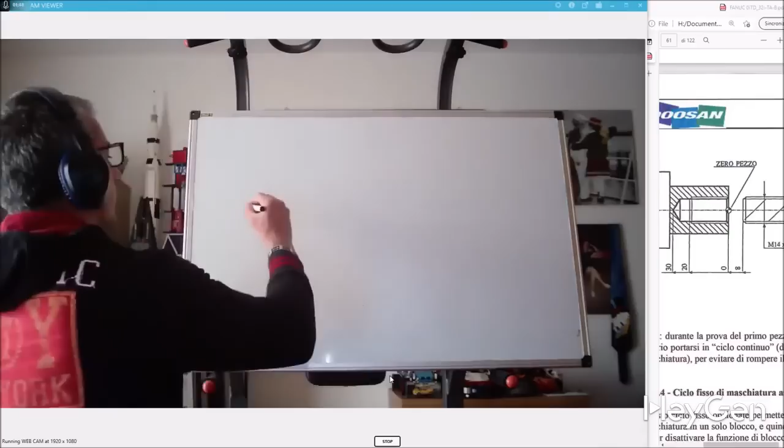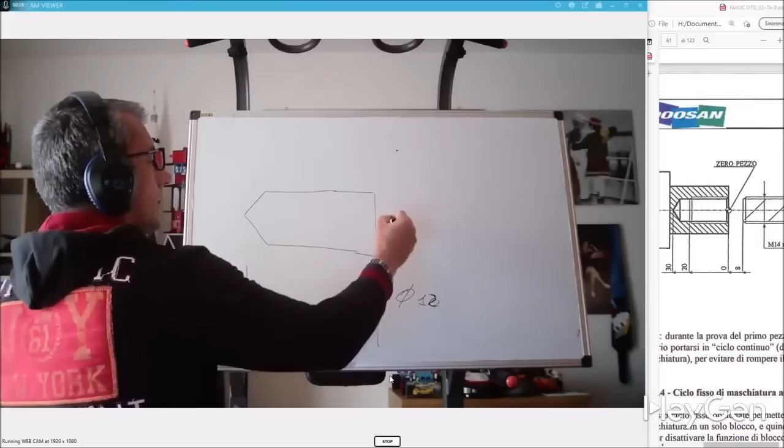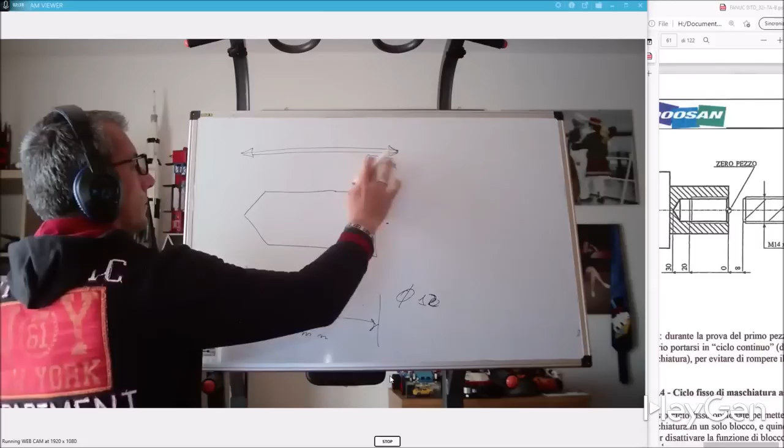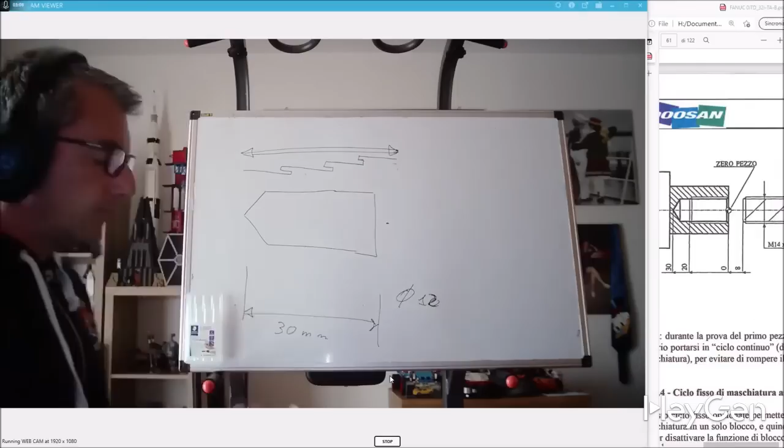Drill bit. There are two options. Either position yourself in front of the piece, move here, do it in one go and then pull back, or do it in steps, retract by a millimeter, do it again, retract by another millimeter. Obviously, this is to help you understand; the tip won't be stepped, it will move in one direction back and forth. This is important for chip breaking, especially with very pasty metals where the chip doesn't break and risks getting tangled around the tip or creating volume in the tip's helix and breaking it.

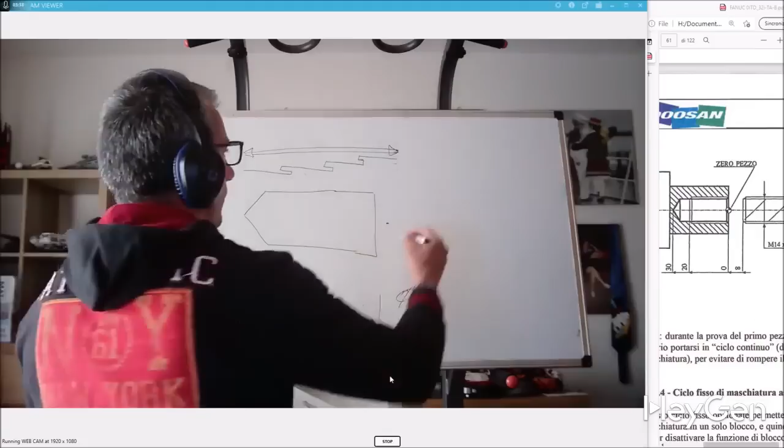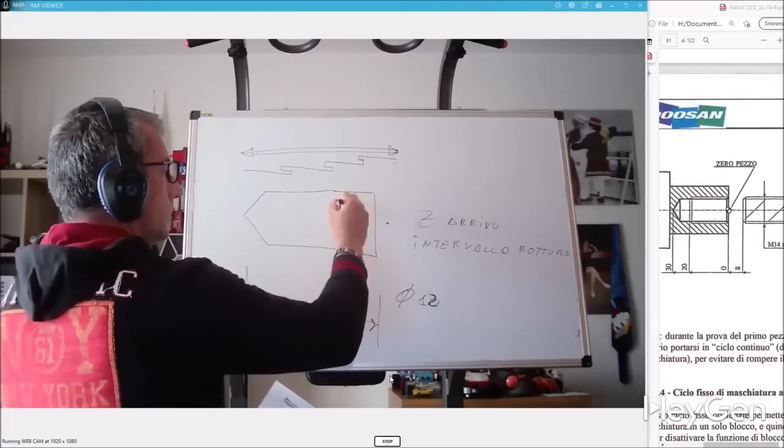Let's say, for example, we have a hole that's approximately 30 long and 12 in diameter. Nowadays those sharp coated tools don't cause problems, but we learn to manage them in this way. We have a flat tip and a low alloy material, so to drill a hole like this, we basically need to give it three parameters. A target Z, a break interval, meaning how often my tip goes in, stops, pulls back a bit, and then re-engages, and retraction, which is how much I want to pull back.

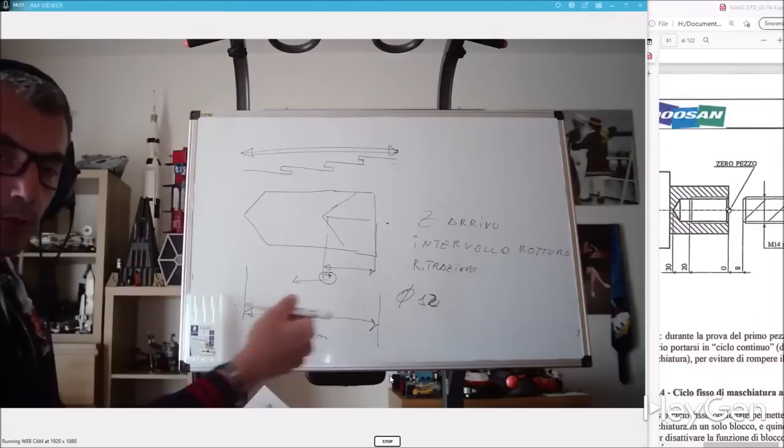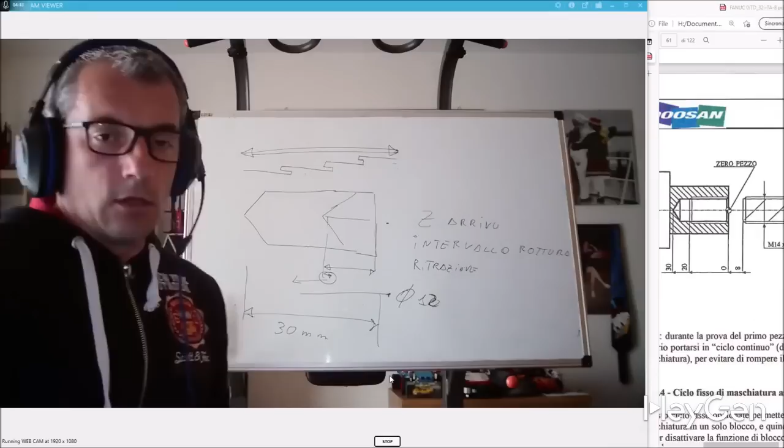Yes, because for some materials, just stopping is enough to break the chip, while for others, it's better to pull back completely. So this is the macro for chip breaking. Some Fanuc machines have this as an option. They even have the ability to completely exit the piece and re-enter. Sometimes it's necessary, sometimes it's not. If the machine doesn't have it, you do it in ISO, make a pre-hole that's half the length, then exit and make the other hole. You also need to use your head a bit. So the three parameters are target Z, break interval, and retraction.

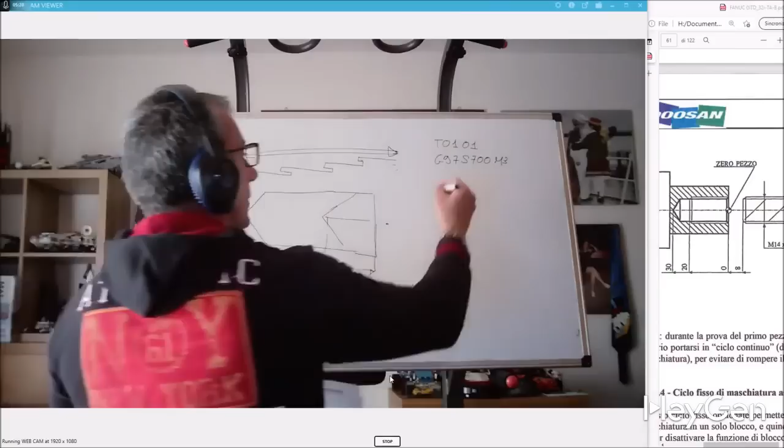Fanuc, how does it give it to you? Let's say we've named our tip T0101 and we're working with a helical tip that is programmed at X0. So what do we do? Let's set a G97, S700, M3. Remember, the drill bits spin in the opposite direction. Then G0, X0, Z4. We position ourselves here, safely.

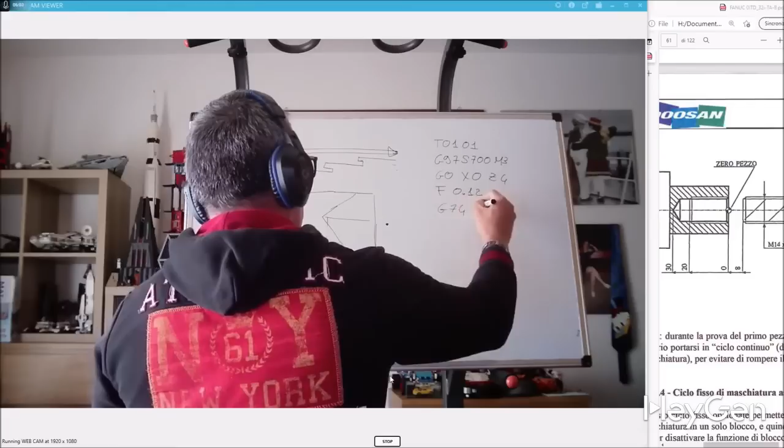In some machines, the F needs to be set first in macros, while others accept it in the macro itself. Just to be safe, we set the feed rate F0.12 before giving the macro. Here comes G74 R1, G74 Z-30 Q5000. What does that mean? R1, G74, Z minus 30, Q. We instruct the machine to peck in 2 blocks.

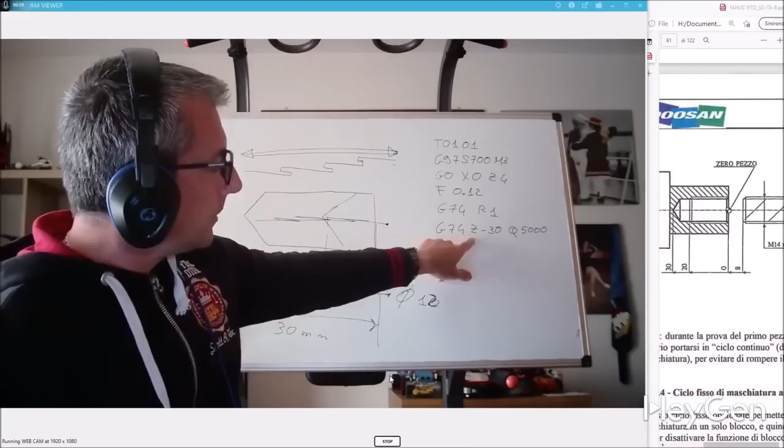Using G74, we execute a deep drilling cycle with a chip breaker. The macro ends at Z-30, moving from Z4 to Z-30 in 5,000 thousandths. Every 5 millimeters, you stop, retract 1 millimeter, and restart. If travel isn't a multiple of 5, the last step can vary. Starting from Z4, steps are Z1, Z6, Z11, Z16, Z21, Z26, Z30.

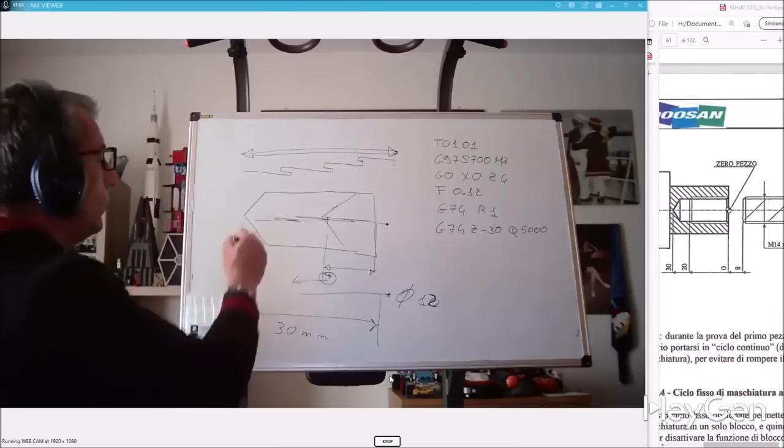Begin with a G1 approach to Z0 before the macro. Once done, the machine returns to G0 X0 Z4. If unsure, repeat G0 X0 to finish drilling. The bit size sets the measurement. If our path is not a multiple of 5, it doesn't matter. The last step will be 2, 3, 4, 2.5 millimeters.

It's not a problem. As you can clearly see and understand, we start from Z4. For the machine, the zero is at Z4, so it will indeed take a first step to Z1, Z6, Z11, Z16, Z21, Z26, Z30.

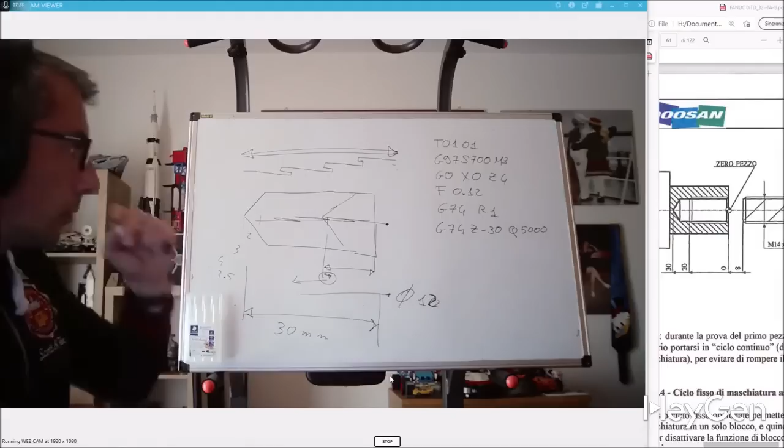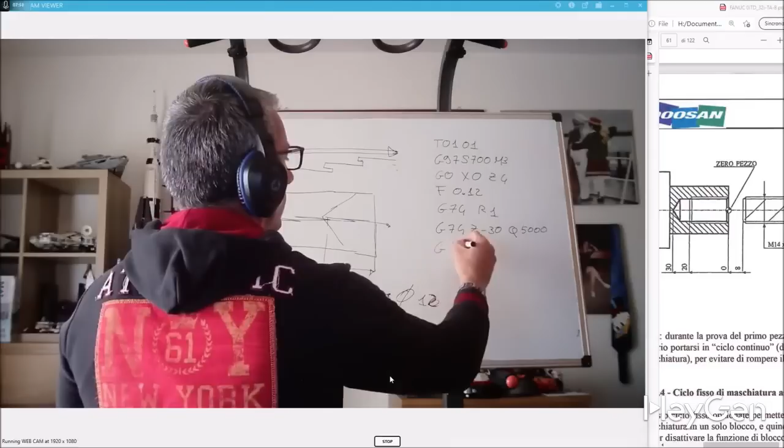So the last step goes from 4 millimeters. Obviously I didn't optimize this. For example, you could have first set a simple G1 approach to Z0 and then started the macro. That said, once the macro is finished, the machine automatically returns to G0 X0 Z4. If you're in doubt or have any concerns, just repeat G0 X0 and you've drilled your hole, you've done your work.

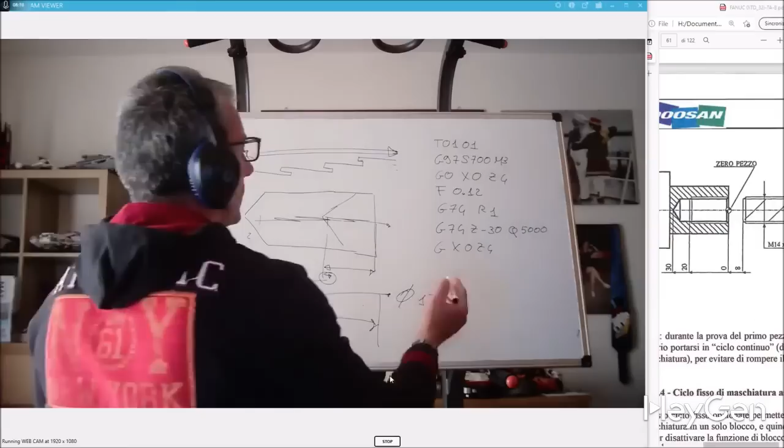You see, in this very specific scenario, the machine doesn't care at all if you have a drill bit that's 1, 2, 10 or 20. It will make its hole, and then the size of the drill bit will determine the measurement. Also, especially in this case, the machine operates efficiently. If you're working with an insert bit for the machine, there's no problem. Insert bits are specifically designed for precision and efficiency, making them ideal for various machining tasks.

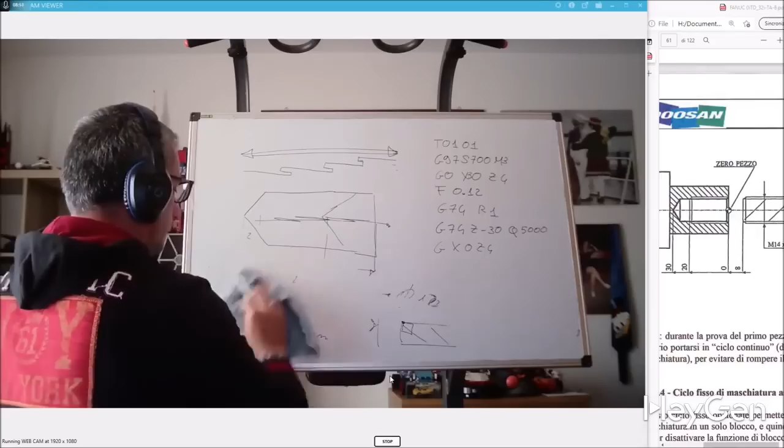If you need to make a 30mm hole, you have a 30mm bit for the machine, so working at 30mm is fine. This ensures that the hole is accurate and meets the required specifications. So if you have a zeroed insert bit, at this point, it can be used like a drill. This means that the bit is perfectly aligned and ready to perform the task without any adjustments. That said, with insert bits, it's not common to break the chip unless in extremely particular conditions. These conditions might include excessive force or incorrect usage, which are rare when proper procedures are followed.

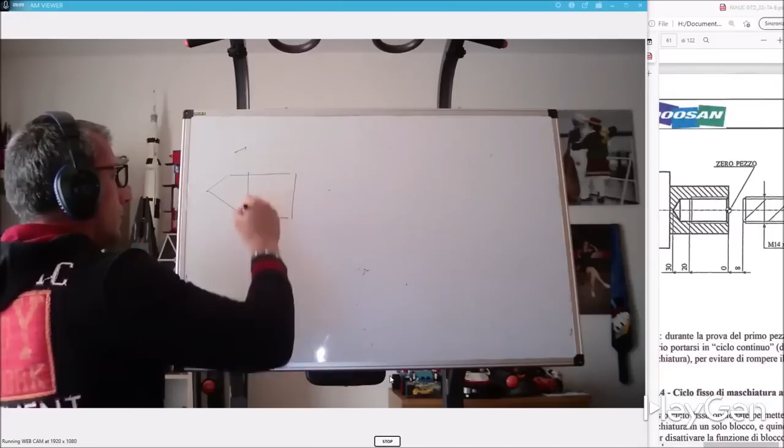Now that we've made our hole, we need to thread it. Threading is an essential process that allows for the insertion of screws or bolts, providing a secure fit. So we have a hole that's 30mm deep, and we need to create a thread that's 20mm long, M14. What do we need to use in this case? We need to use a tap. For those who don't know, a tap, let me prepare a slide for this. Just look up M14 tap online, and you'll understand what it is.

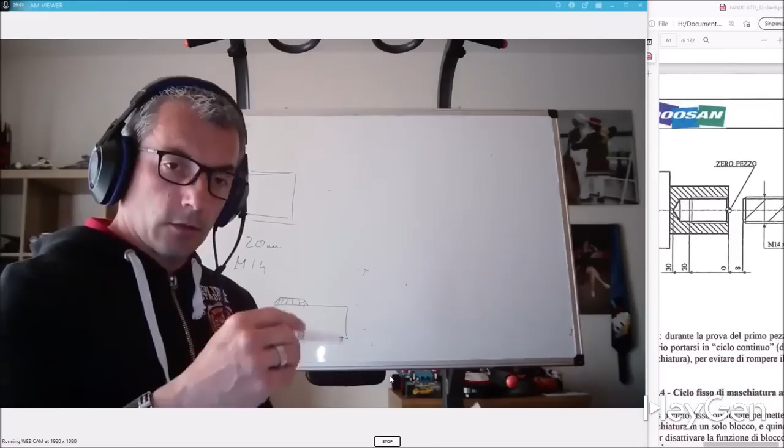It's a cylindrical tool with a series of tapered threads, basically a male thread, which, when it goes in, removes material and creates the threading. This process is crucial for ensuring that the threads are clean and precise, allowing for a strong and reliable connection. It is obvious that when a tap enters, the mandrel must turn in one direction, as if it were being screwed in. When the tap reaches this position, the mandrel must stop and turn backwards to allow the machine to go back without stripping the thread. Here's a little issue that CNC machines have solved for us quite easily.

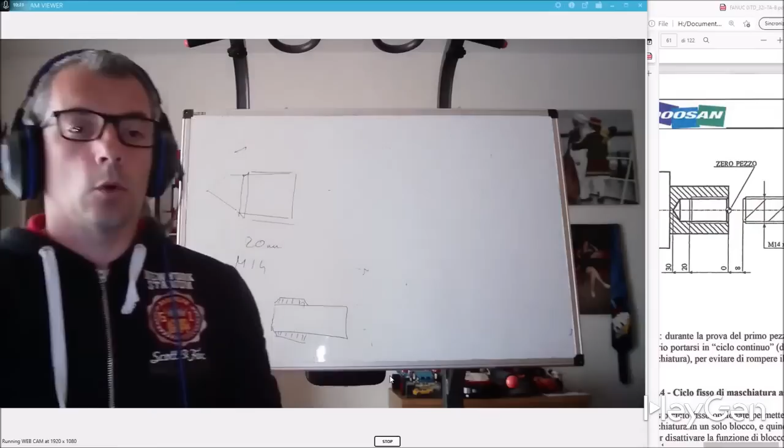There are two methods for threading, with or without a compensator. What is the compensator? The compensator is a gadget that I personally hate. I've probably used it 3 times in my life. Basically, there's a sort of spring here, and when the tap reaches the bottom and the motion reverses, it allows the tap to oscillate in this way so it doesn't break, because during the reverse motion there's a real risk of the tap breaking.

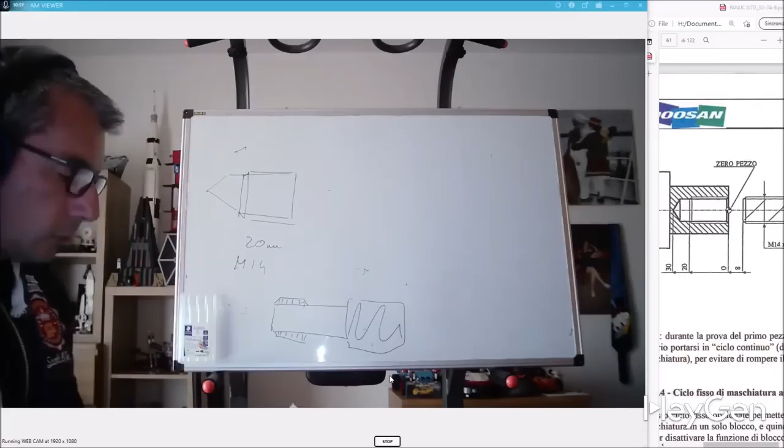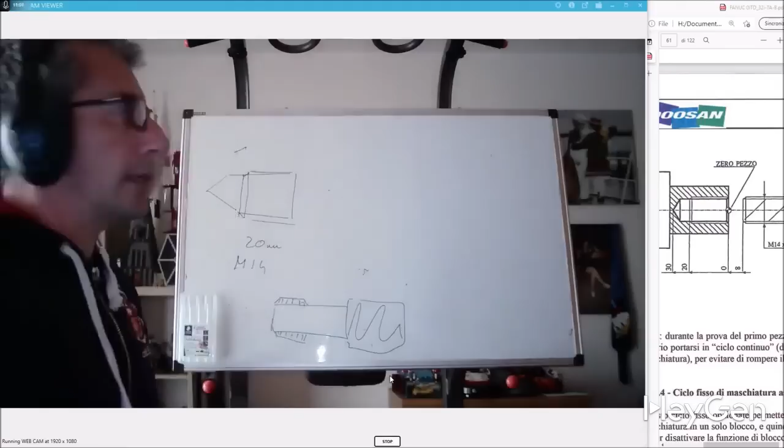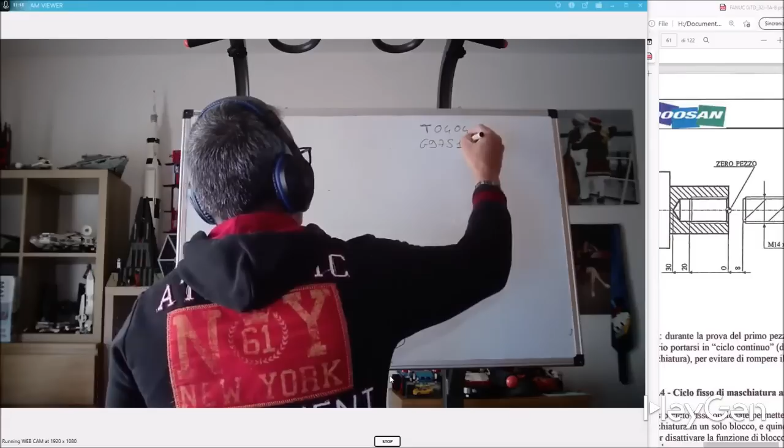If you have the compensator, I don't know if you remember, you thread in G33, which means that threading is always done at fixed speeds, so it's called. The T0404 tool is typically written G97 S100 M3, or M4 if you're tapping right or left. This depends on the type of thread you're making. G0 X0 Z4, G33 Z20 F2, pay attention to M4. So, first, M4 S100 G1 Z4 F2.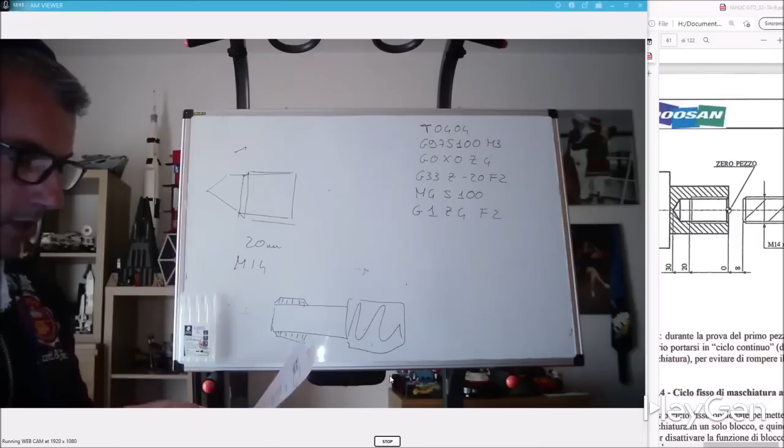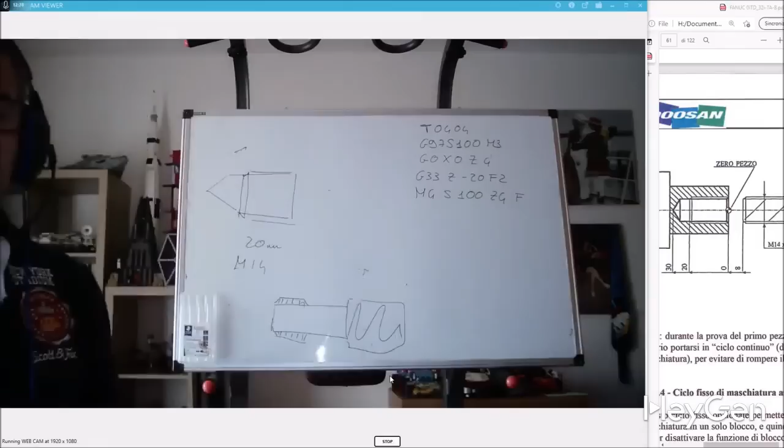I hope I wrote everything correctly because this isn't my usual way of threading, but I did take a couple of notes, so let's see if I got it right. Yes, perfect. These two blocks need to be written exactly together. So Z4 F2. This is the right way to thread with the compensator. I've never seen anyone thread with a compensator in a company, so if there's anyone with different experiences, please write them in the comments because I'd love to hear them. If these compensators exist, there must be some applications or fields that go beyond my experience, and that's totally fine. So this is the method for threading with a compensator.

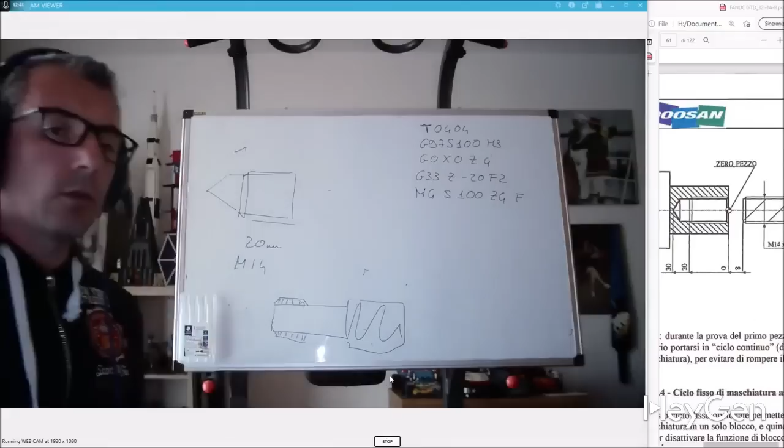I repeat, the compensator allows the tap to thread during the motion reversal, enabling an oscillation of the tap in this sense, so the motion reversal isn't a shock for the tool, and when turning in reverse it comes out like a screw. It was my duty to show you this. Now I'll show you the macro, the fixed cycle for rigid tapping.

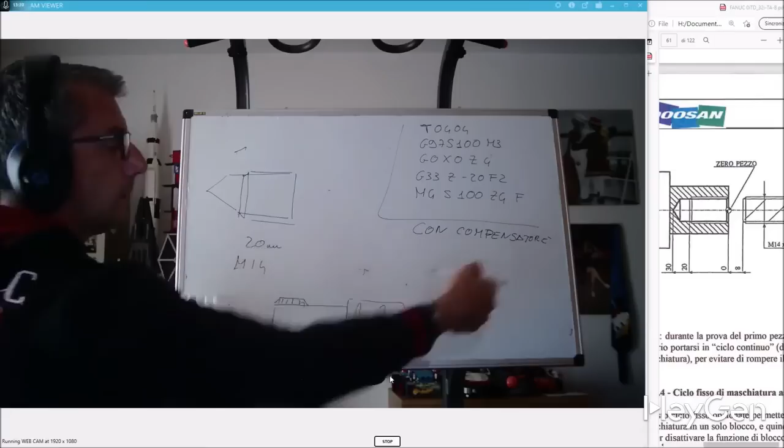So the tap is locked in a chuck, which could be an ER25 or ER32 depending on the machine. This tap is secured in the chuck, and you don't move it in any direction from there. So the only thing you need to be careful about is to make sure that when you're at X0, the tap is perfectly centered with respect to the self-centering chuck. Now I'm going to show you the macro, the fixed cycle for rigid tapping.

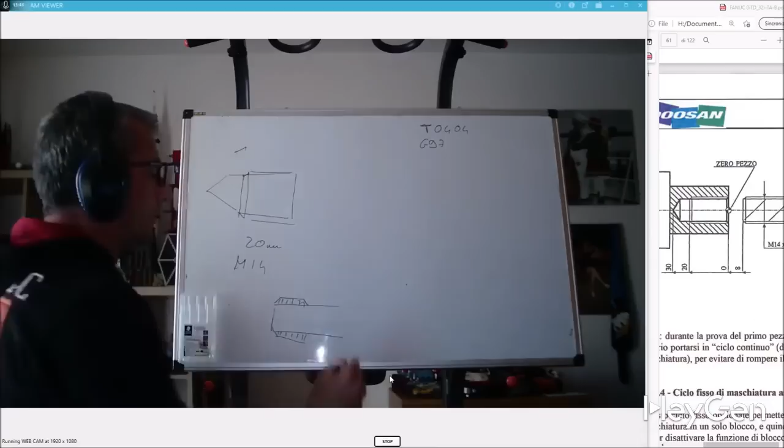So the tap is locked in a chuck, which could be an ER25 or ER32, depending on the machine. This tap is secured in the chuck, and you don't move it in any direction from there. So the only thing you need to be careful about is to make sure that when you're at X0, the tap is perfectly centered with respect to the self-centering chuck.

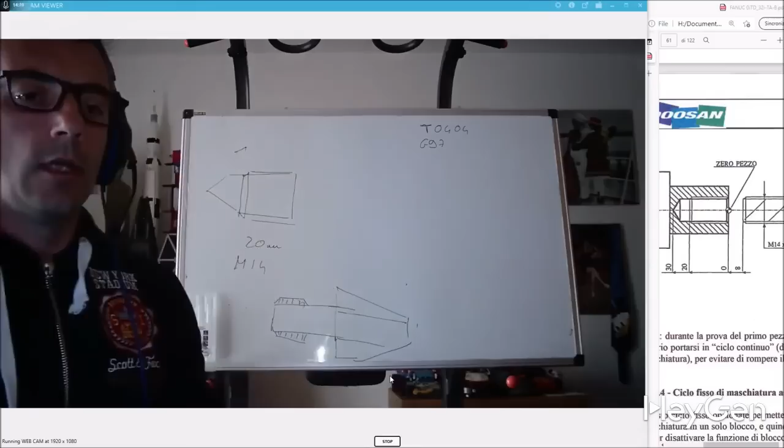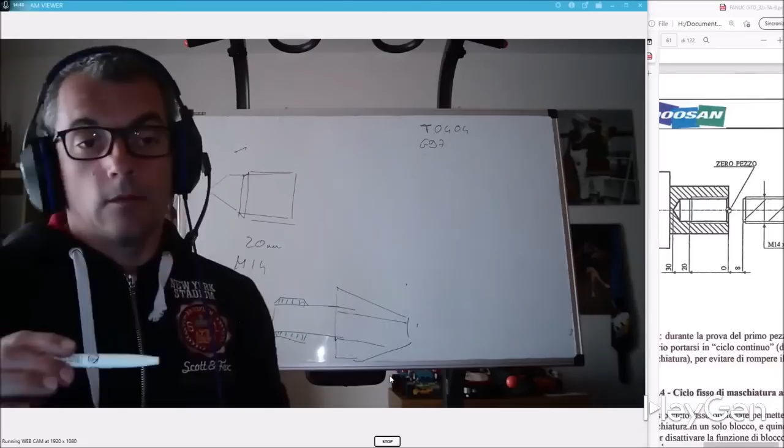To know this, you position the machine with the 0 comparator on the self-centering chuck on the shank of the tap. A 360-degree rotation gives you a range of 5/100ths. Otherwise, the tap is misaligned by a margin that risks breaking it. So, I repeat, when you're tapping, and even more so when you're drilling, check your machine. When you're at X0, the machine's X0 must align perfectly with the workpiece's X0. I warn you that this often does not happen in the company.

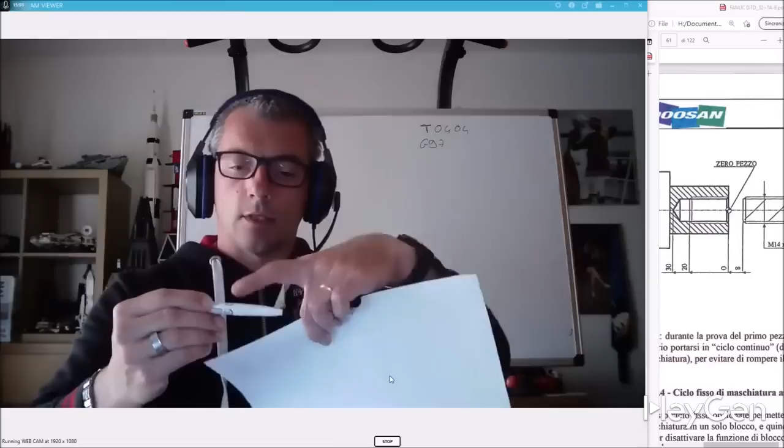Machine issues aren't from age or damage. Adjust X for 0. Shim if Y is off. Check X0 often, especially on older machines. Experienced workers know. So, as long as it's high in X, in X plus or X minus, you just need to move the X a little to make sure the probe's comparator is at 0 above and below, and tell the machine to measure X0, basically zeroing out the tap or the drill bit.

However, when it's high on that hypothetical axis that we don't have, which is Y, you need to intervene mechanically on the tool holder's locking by shimming it. It's not nice to say, but shimming it makes people frown. In companies, we don't always have the latest machines in perfect condition.

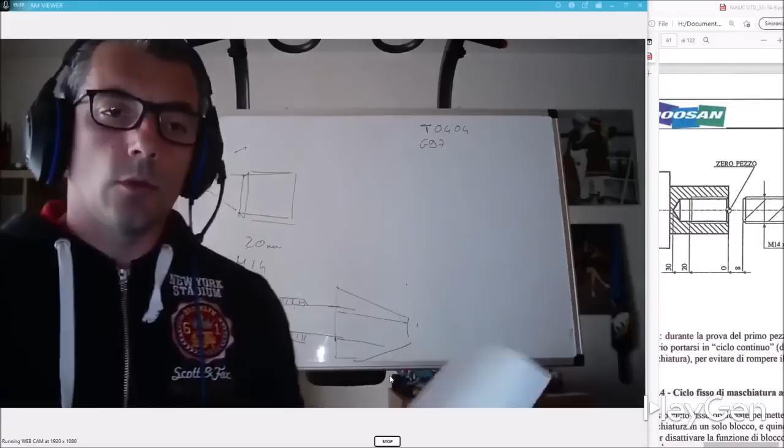This isn't a check you need to do every time you mount the tap, especially if you're always using the same machine. You need to know your machine, so once every 4 to 5 setups, check that X0 corresponds. If it doesn't, make a note of it and write down any adjustments you made to bring it to 0, because this applies to all turret stations.

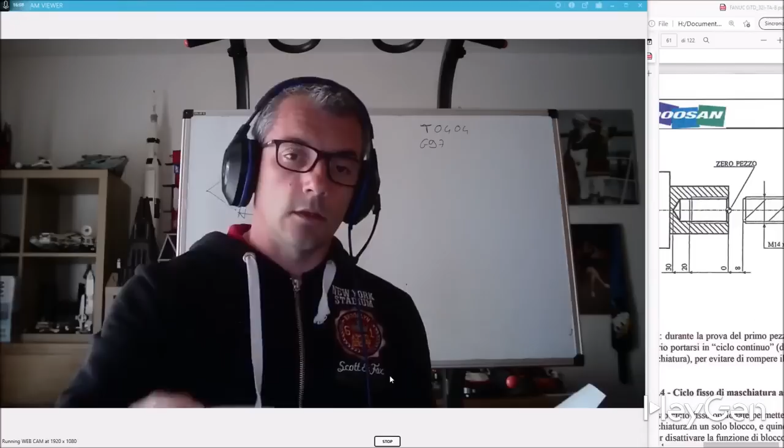Those who have been working in the workshop for a few years will definitely follow me. Those who have never worked in a workshop will remember my words one day and say, oh right, that guy from the course told me that despite everything the manufacturers say, I need to check the taps.

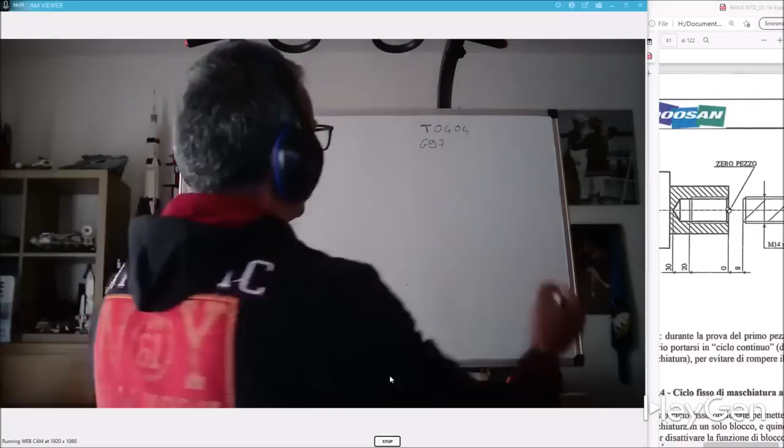Now, back to us. So, rigid tapping with alignment. First of all, we need to force G97, telling it that we're working at fixed speeds, but we won't give it any data because the self-centering chuck shouldn't be rotating right now. I'm positioning myself at G0, X0, Z8.

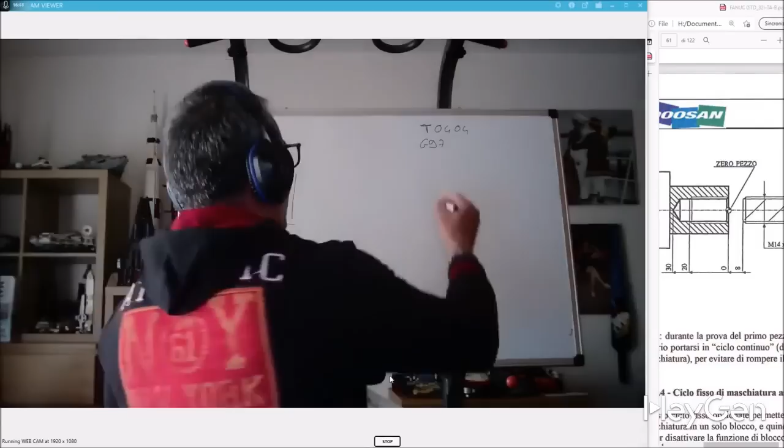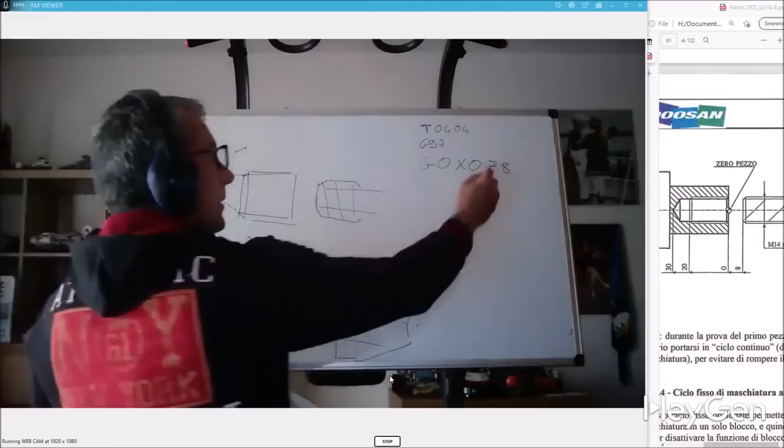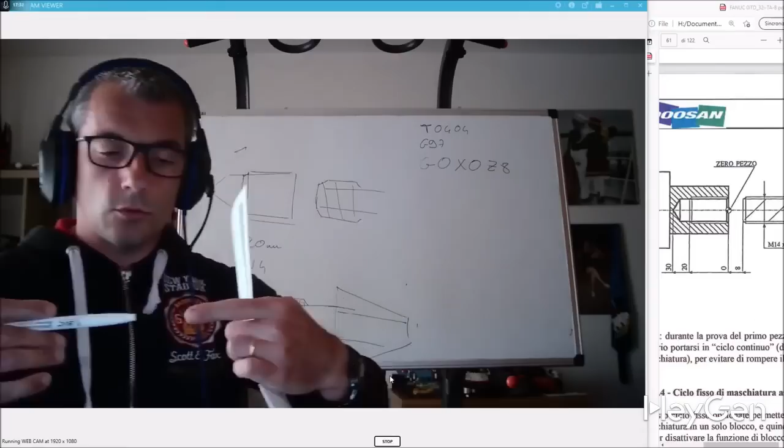So I bring the tap right here. I remind you that the self-centering chuck is currently stopped. Give yourself a good margin in Z because you need to give the self-centering chuck time to start. When the chuck starts to move, so does the Z-axis. It will start moving, but it needs to accelerate. You can't go from 0 to F2 instantly. You need to go from 0 to F2 over a fraction of a second.

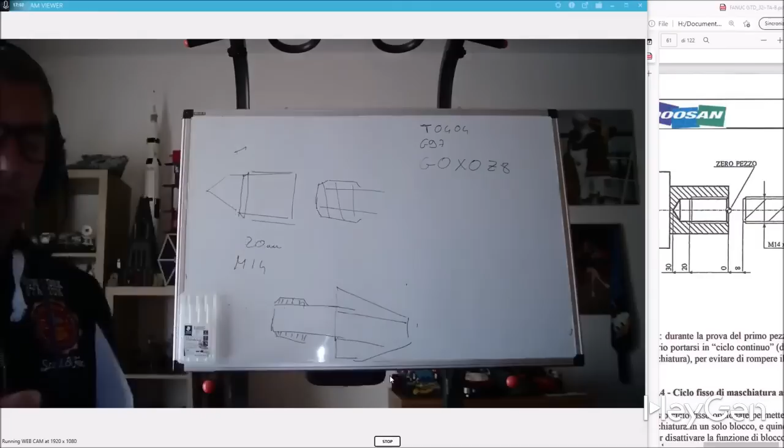If I haven't reached a constant speed by the time I enter the workpiece, I'll strip the thread. So it's better to start tapping well outside the piece, 2, 3, in this case 4 times the thread. It's such a quick operation that time isn't our concern. It's about preserving the tap.

At this point, I can't remember everything by heart. If I could remember everything, I'd be a pro.

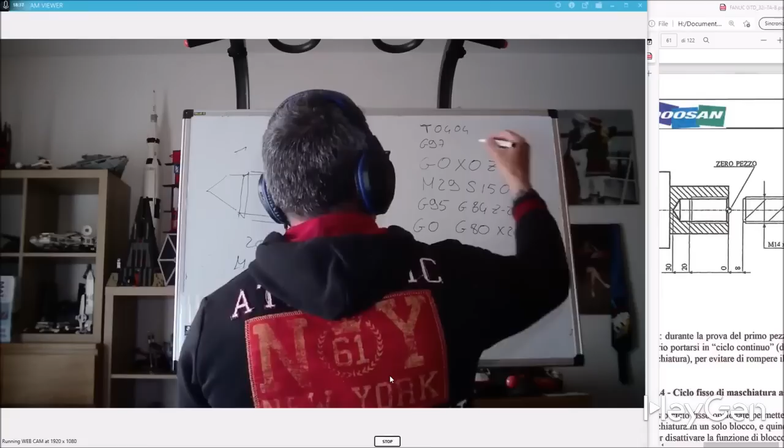M29 S150, then G95, G84, Z-20, F2. Now let's explain. G0, G80, approximately X200, Z200. We can place the M8 wherever we want. Tapping right is rarely done. So, what did we say to it? We are here. We brought ourselves here in front.

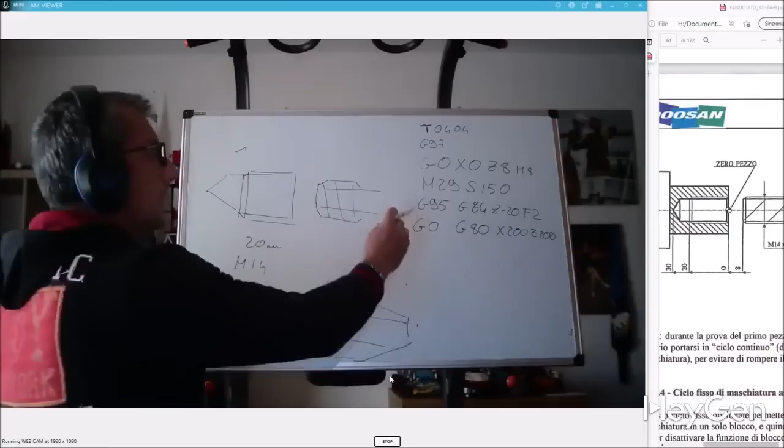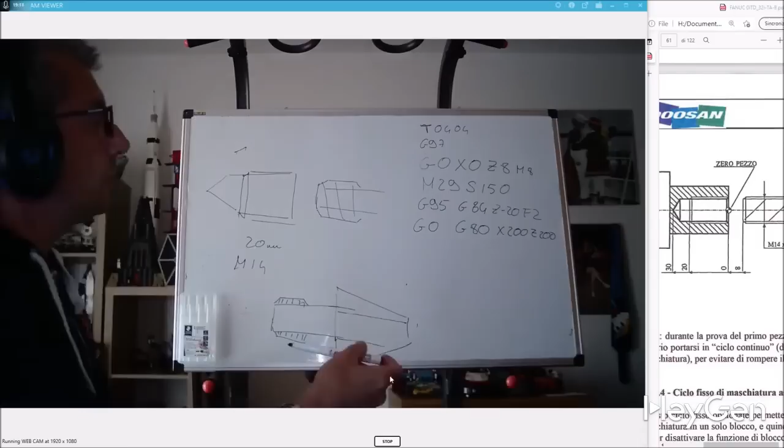M29, S150. We tell the machine, hey, watch out, we're starting a fixed cycle at 150 RPM, a fixed cycle for rigid tapping. Rigid tapping will happen in G95. If we've already set G95 earlier, there's no need to repeat it, but for sure, F is 2 millimeters per revolution. If I want to make a pitch of 2, every turn my tap needs to advance by 2 millimeters of thread down to Z-20, and then I'll come back.

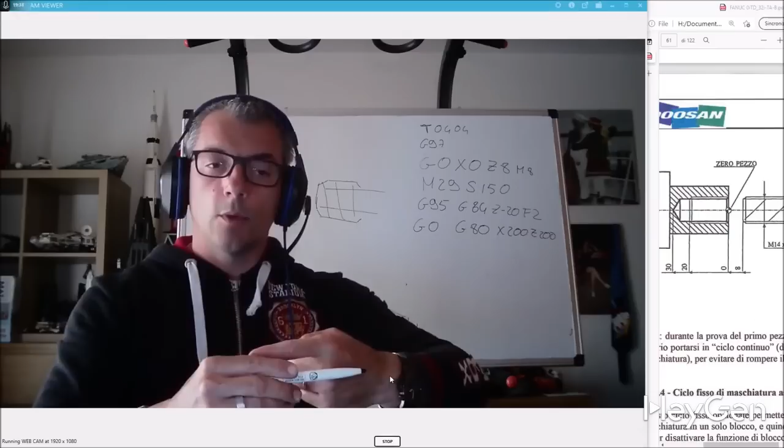There's G84 at the starting point, so the self-centering chuck starts, accelerates, and when I find the hole, I'll already be at F2. I reach Z-20, slowing down with an acceleration and deceleration that won't shock the tap, and then slowly the spindle turns in reverse, and the tap comes out. This is the rigid tapping cycle. G80 tells it to end the cycle.

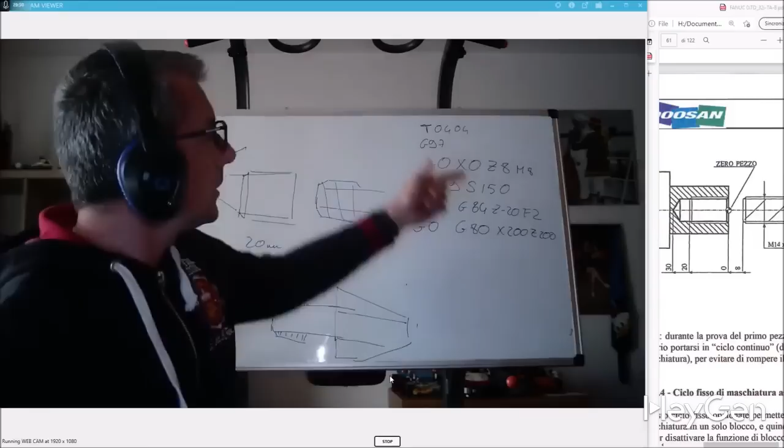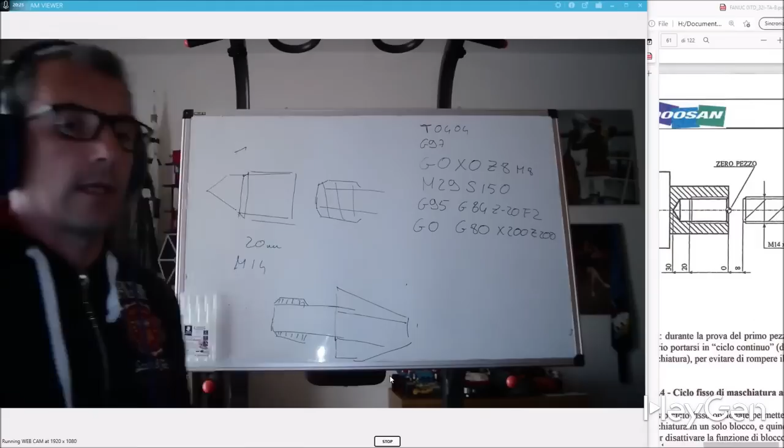Finished. Move away. All rigid threads are done this way. So for the M29 approach and the RPM, I want to thread, obviously. If I'm threading an M4, I'll have 300, 400 RPM depending on the quality of the tool I'll be using. If I'm threading an M20, I'll have 170, 180, again depending on whether I use a synthetic tap, an HSS tap, a taper tap, a Russian tap, or a German tap, because quality makes a difference.

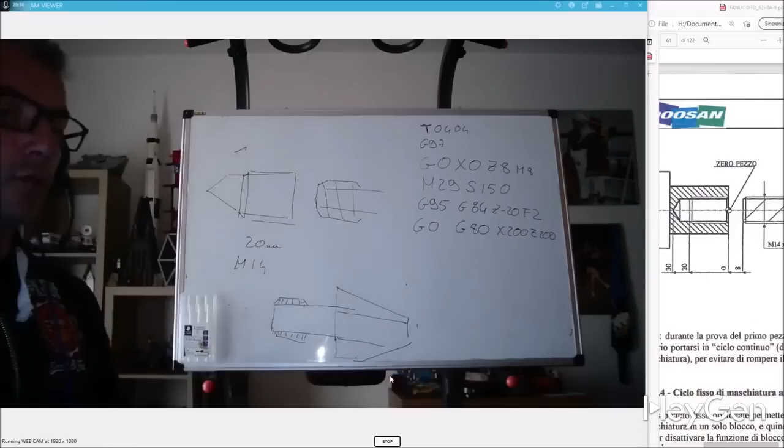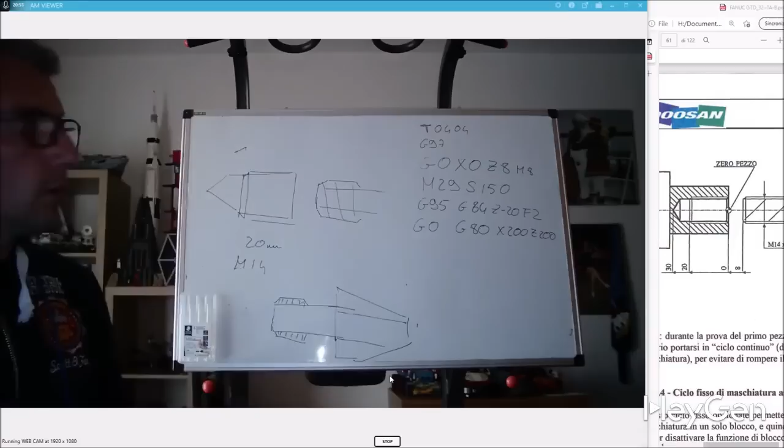And then you need to make sure you're in G95, G84 with the feed rate equal to the pitch. If you have any doubts, use the thread pitch on the tap and check the tables. Never throw a tap with F2 into F1.5 because you'll break it or tear the thread. G80 says good, we're done, get out and go away. So any threading or tapping is done this way.

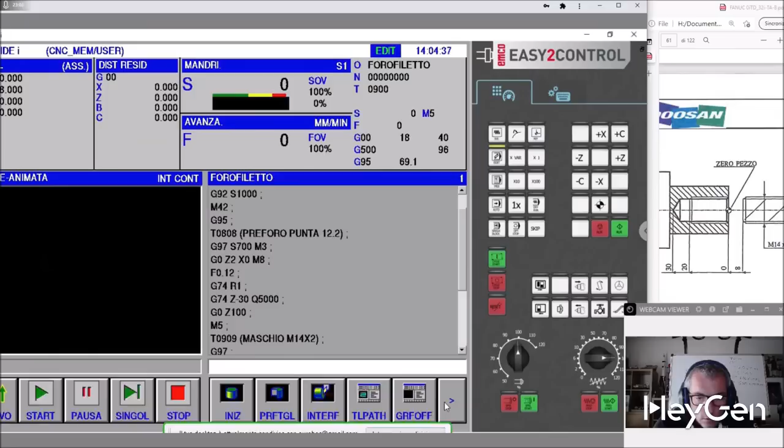This example has been brought to the simulator. In the simulator, we use tools T8 and T9. Excuse me. Here we go. To the tool offsets, T8 and T9. We set a radius for T8, which will be the drill bit of 6 mm, because it's a 12 mm bit, and the tap is an M14 with a radius of 7. After that, we told it that it's a bit oriented to position 2 and at 120 degrees, then a tap setting 2, and that's it. We don't need any more data.

Here we just wrote exactly what we saw on the board. G97 S700 M3. We positioned ourselves, set the feed rate to G74 Z-30 at Q5000, and entered all our data. The only thing we forgot is the M3 at this point, because we stopped the spindle. But let's take responsibility for that. So here we need to insert an M3. After that, we can execute.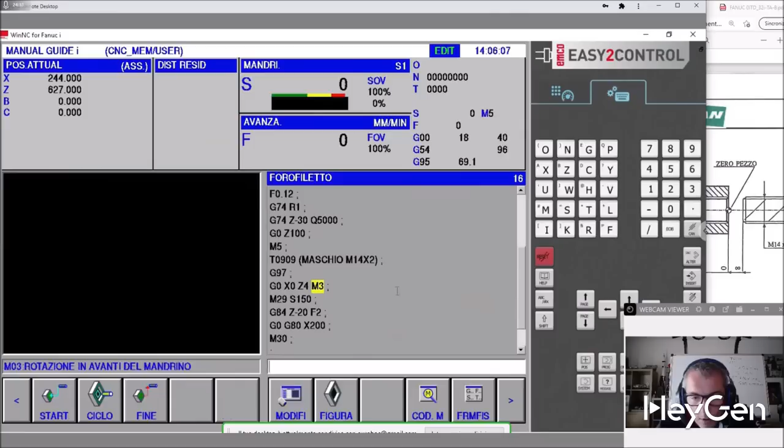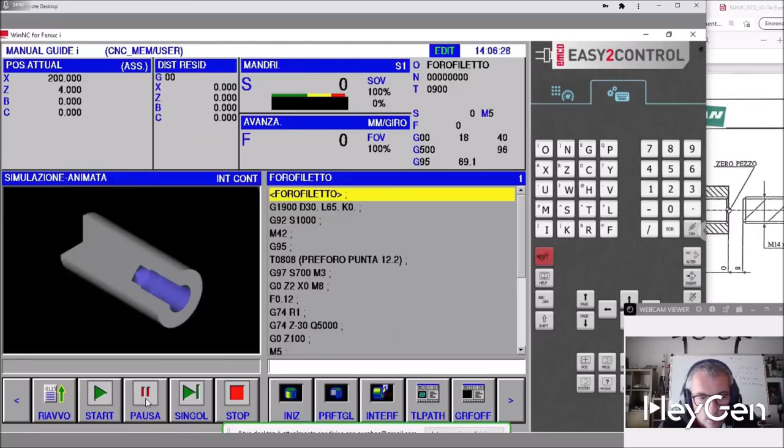Here we have our M29, G84, Z-20. We can go. I'm just asking the machine to actually simulate our part, and you can see that it's been done. Now it's not very clear, but here we have our piece. Let's pause, cut, and switch to a single block. You see, I started from Z2, I'm right at Z12, I move away, and now I'm at Z17, I move away, and let's indeed restart. I think it's a bit unclear.

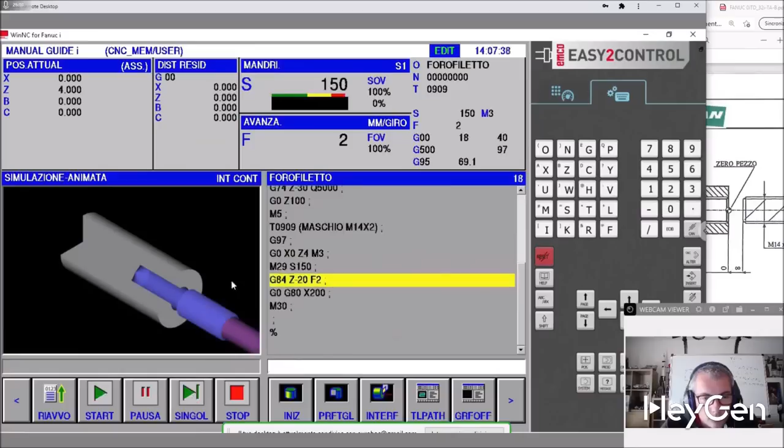Board had Z8. CNC adjusted, wrote Z4, moved back in Z to accelerate, then tapped. We didn't see it, but it tapped. You see it. Back to Z4. Notice, I move, stop the spindle, and start the roughing macro. The CNC adjusted from Z8 to Z4. For tapping, it tapped quickly and returned to Z4, showing its autonomy. We know how to turn, rough, drill, tap, and thread with G33.

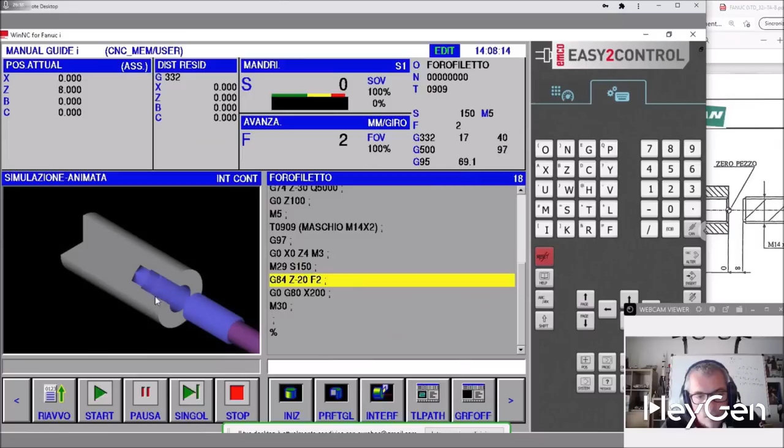In the example on the board, I had already written Z8. The CNC, which is quite smart, automatically adjusted itself, even though I didn't write Z8 here but Z4. It moved back in Z by a distance that allowed it to accelerate on entry. Then it started tapping. We didn't even see it because it was faster than us, but it did tap. And you can see it from here. Okay, but look, it went back to Z4. Did you?

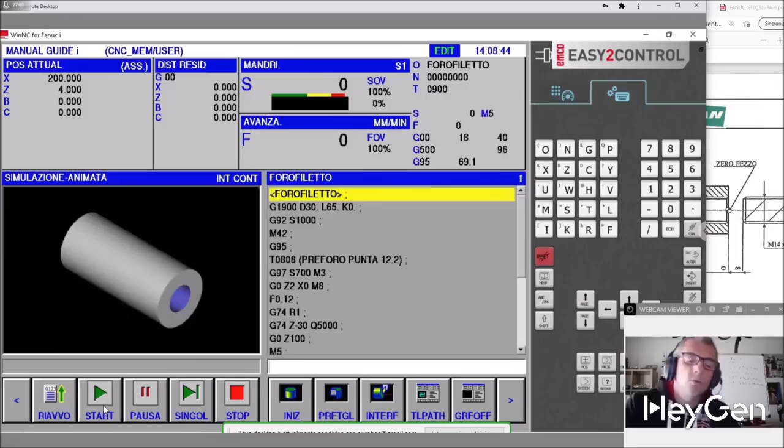Notice that it advanced. So there are some things that we programmers don't know, but the machine does them completely autonomously because it has parameters that say if I don't start from at least a certain distance, I can't tap. Perfect. Let's stop, restart, and do it all at once. I'd say we can wrap up this video here.

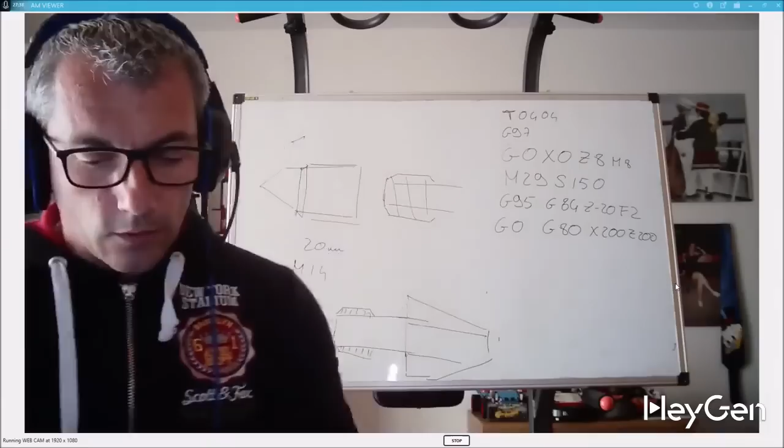So at this point, we know how to turn according to profiles, rough inside and outside, drill with the breaking tool, tap, and we'll also know how to thread with G33. We've seen the grooves, but now we're going to look at them together with the threading cycle, which is the famous G76 for making external threads with the turning tool, meaning not with the external or internal tap. It doesn't change anything. This is what we'll see in the upcoming videos.

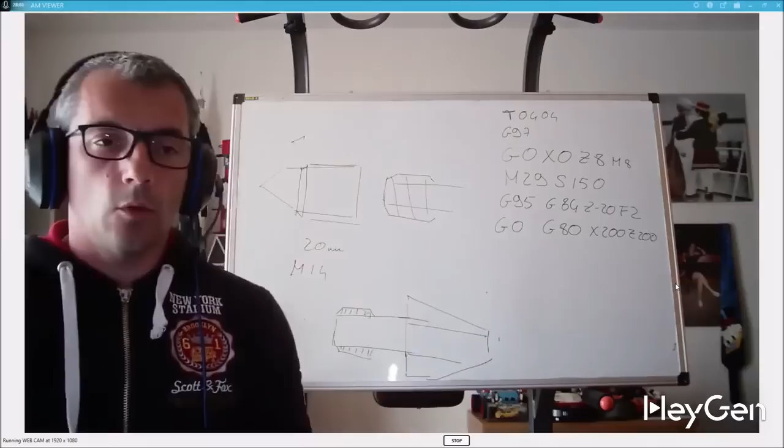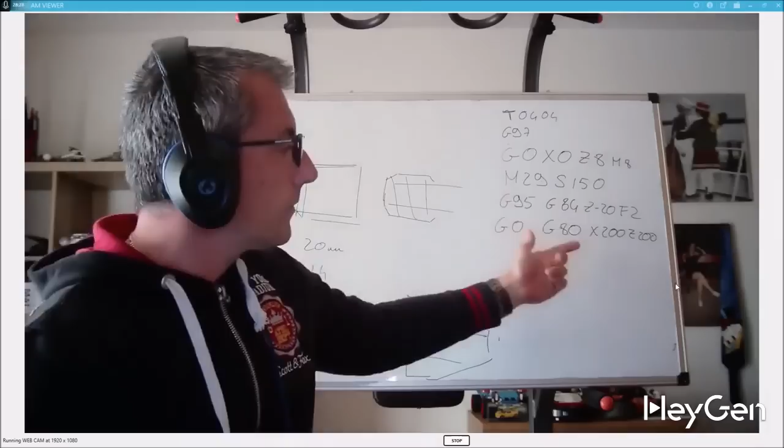I'll try to rely more on the whiteboard than on the simulator, because this isn't a course focused on a single CNC. I want you to understand why we write these codes. If you find G170 instead of G84 on another CNC, it's just a code change. But the things a machine needs for tapping are the same: endpoint, safety distance, and pitch. So conceptually, nothing will change even if you switch CNCs.